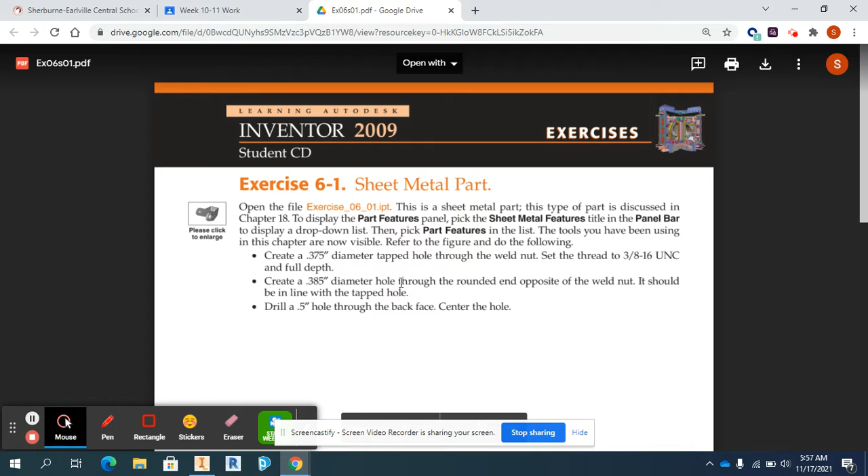Students, in exercise 6.1, you're going to be introduced to the hole tool as well as fillets and chamfers. So download exercise 6.1, the binary file. Also, you're going to need to use the PDF file. So I already have the PDF file open, and the scope of work is this. We have to use the hole tool to make a tapped hole here, and then use the hole tool here and here.

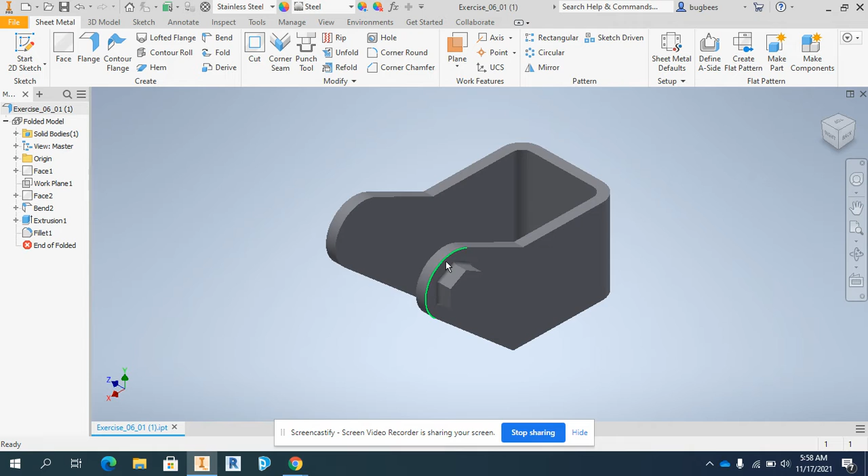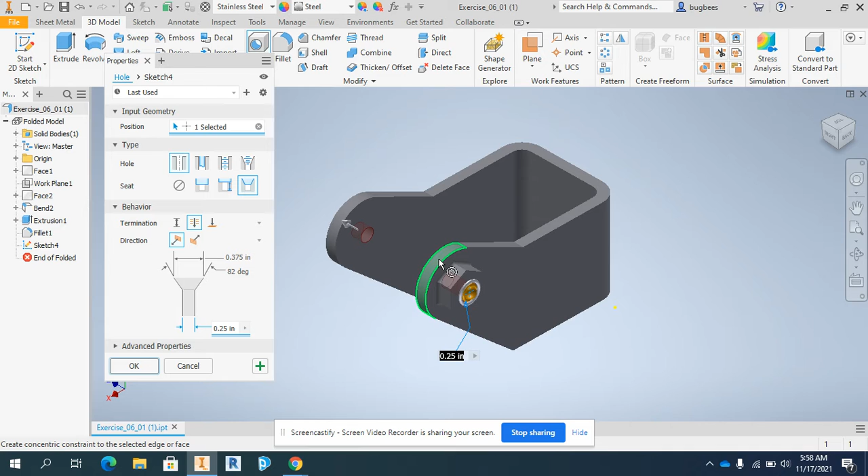So let's get started. I've already opened it up in Inventor, and none of those holes exist. This is a sheet metal part, so I have to go to the 3D model, and then I have to go to the hole tool. The easiest way to use the hole tool is to select the surface you want the hole on, which in this case is the top of this hex weld nut. The second option is to select a reference. In this case, you want to select the arc that's associated with the center point of that hex nut. So I did that, and now it's centered correctly.

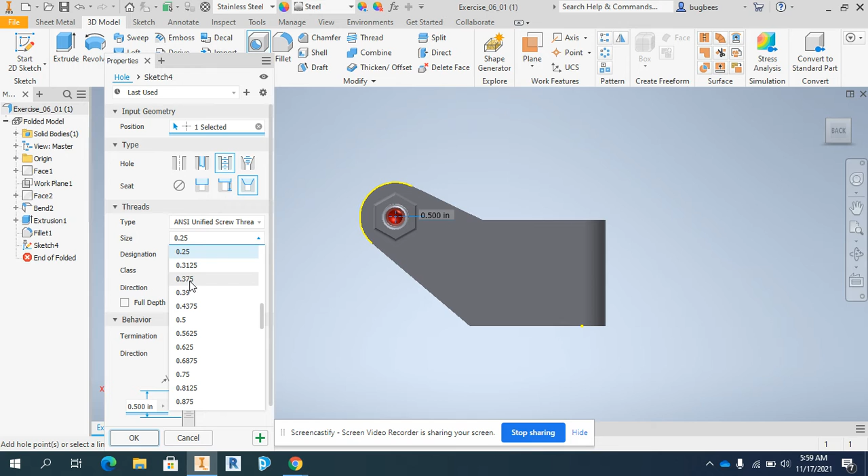From there, this is going to be a tapped hole. So you just cycle through these options: simple, clearance, tapped, taper tapped. This one's going to be tapped, which opens up a whole other list of threads. There's a wide variety of hardware out there. In this case, our PDF document says create a 0.375 diameter tapped hole through the weld nut, using the 3/8-16 UNC.

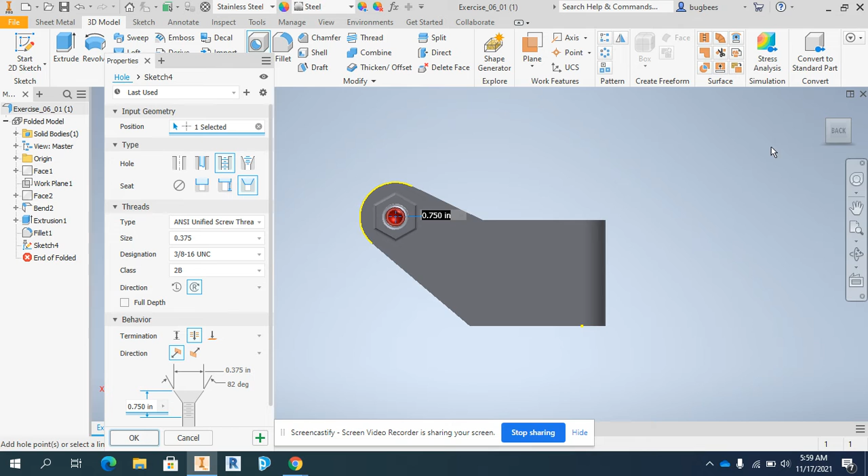UNC stands for Unified National Coarse. There it is, 3/8 UNC, and there's no other features we want here. No counterbore, no spot face, no countersink. But in other tutorials, it's going to ask you to do this type of stuff. Anyway, next I can select my termination: a distance, a through all. I don't want to go through the backside with a tapped hole, so I'm going to select to this surface. I'm going to press OK. And you can see that the threads have generated. Once again, that's 3/8-16 UNC.

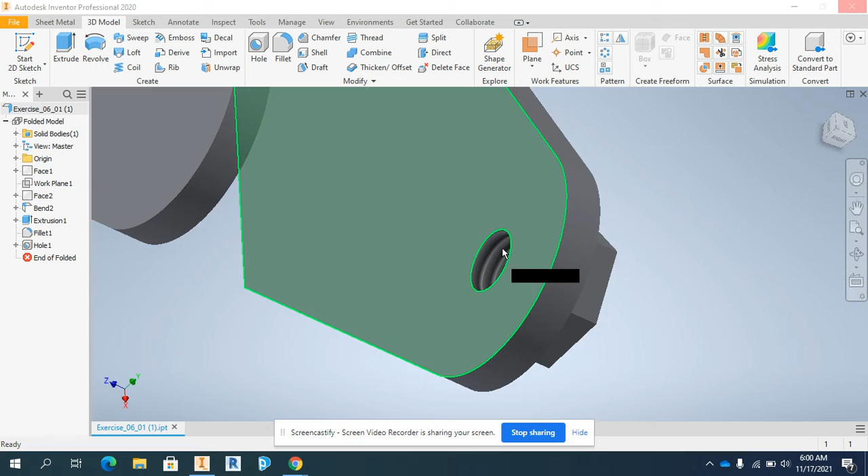The next hole, the computer's going a little slow. I'll just do one more. Hole tool, this back surface. And I don't have a circular reference, so I may have to do this a different way. Watch this one. Sketch. Come on, computer.

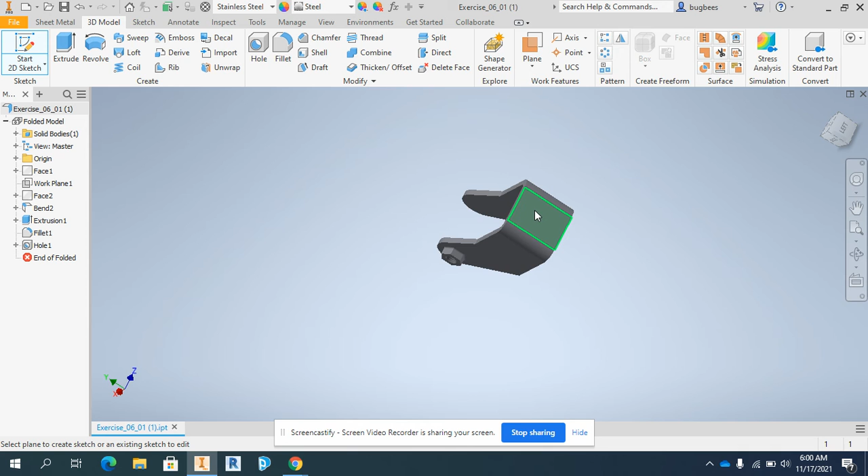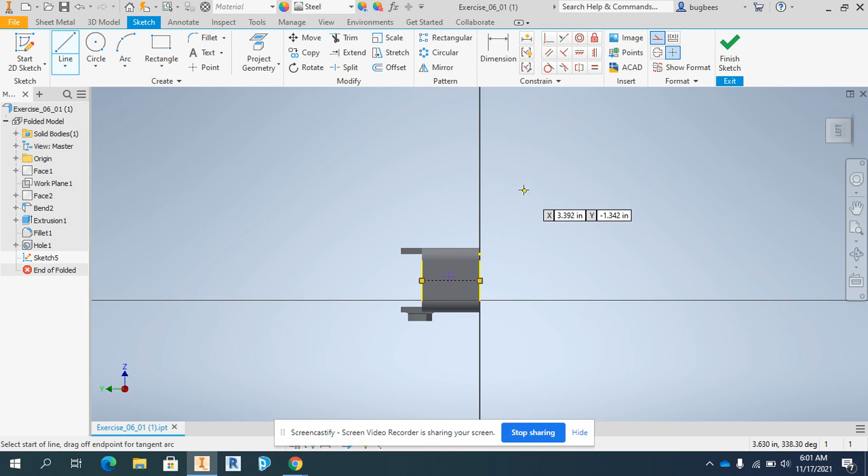Point center point tool. Project geometry. Line tool. Construction line. Coincident constraint. Zoom in. Point center point to midpoint. That gives me my location for my hole tool. Not my fillet. Hole tool. There it is. This one's going to be a 1/2 inch, so you can go ahead and make those changes.

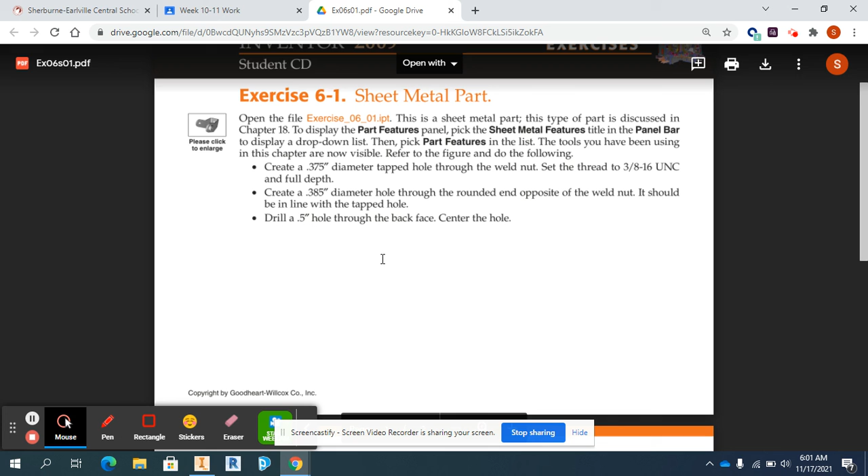Follow along with the tutorial for the rest of it. The back hole is 0.5 inches. Put that data in there, and then do the last one using the first method. Once again, that one's not tapped. It should be in line with the tapped hole. Okay, good luck.